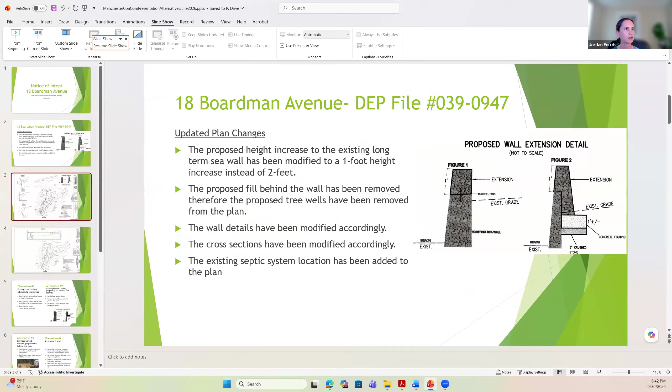Okay. So these are the topics I just explained. The 2 foot height has been changed to 1 foot. The proposed fill has been removed, as well as the proposed tree wells. The wall details have been modified, the cross sections have been modified, and the existing septic system location has been added to the plan. And then I can zoom in on the plan.

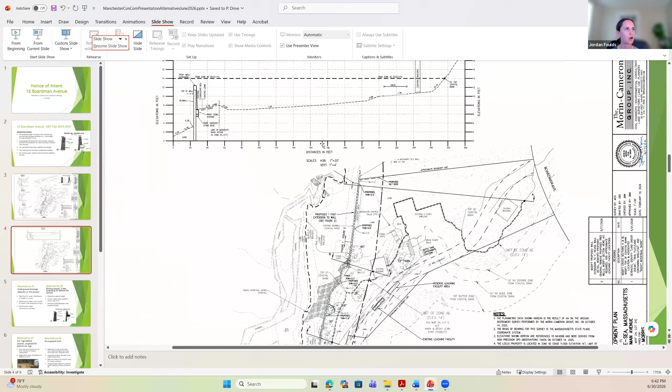As you can see, we've added the septic system and leaching field in the back over here, adjacent to the existing building in the back, as well as we've removed the tree wells and the proposed fill. And as you can see, the cross sections have been updated.

We have 4 alternatives. The first alternative is the underground drainage adjacent to the seawall. One of the commissioners had mentioned this in our previous meeting, and so we made that one of our alternatives. This would significantly increase the amount of disturbance to approximately 5,000 square feet or more, and this would be a significantly higher cost at around 3 times the proposed project. Additionally, this would result in a longer construction schedule.

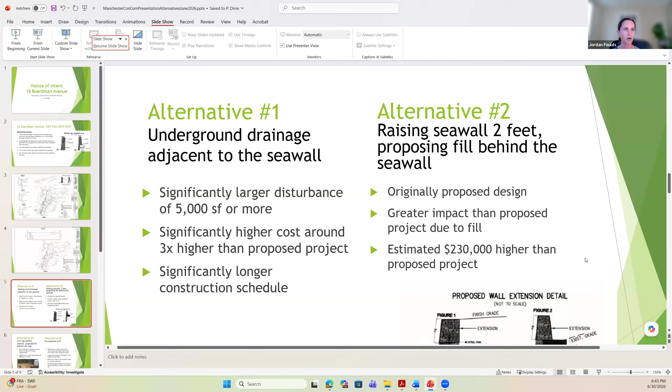The second alternative, raising the seawall 2 feet and proposing fill behind the seawall, was the originally proposed project, and this would result in greater impact than the proposed project due to the fill. Additionally, this would result in approximately $230,000 higher than the proposed project.

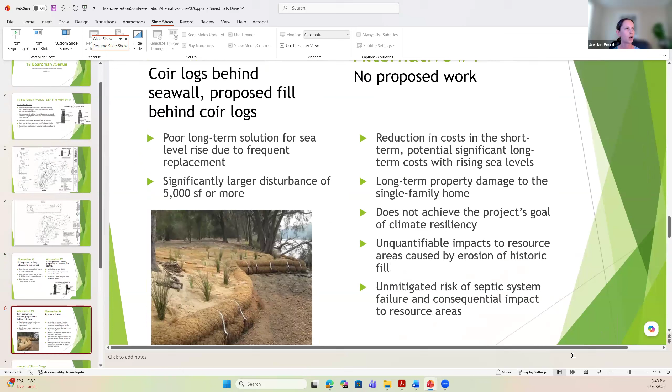The third alternative is coir logs behind the seawall and proposed fill behind the coir logs. This would be a poor long-term solution for sea level rise due to the frequent replacement of the coir logs, and it would result in significantly larger disturbance of approximately 5,000 square feet or more.

The fourth alternative is no proposed work, which would ultimately reduce the costs in the short term, but could result in significant long-term costs with rising sea levels. This could result in long-term property damage to the single-family home and does not achieve the project's goal of climate resiliency. This could result in unquantifiable impacts to the resource areas caused by the erosion of the historic fill and result in unmitigated risk to the septic system and consequential impact to the resource areas.

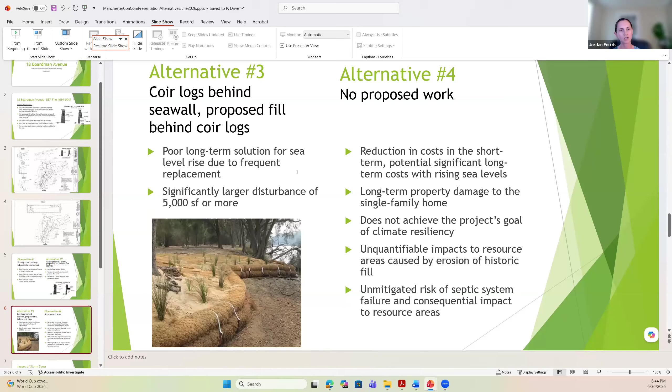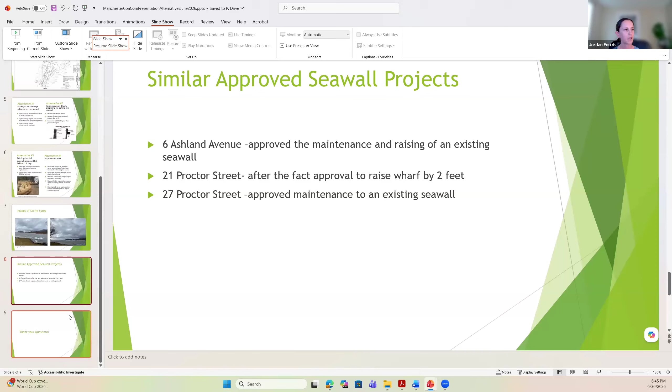Thank you, Jordan. Are there questions from the commission? I have a question, Steve. Fire away. Thanks. I appreciate the alternative analysis. Thank you for submitting that. You've noted the location of the septic system on the plans, and I seem to recall from our site visit, and it also looks like from the elevation, that these are quite a bit higher than the existing bank. So I was just wondering if you could comment on what you think the impact would be to the septic system. Are you asking about the impact with or without the addition of the 1 foot? Without any addition.

I'm going to answer only, and then of course Jordan can answer also. The problem with estimating an impact with sea surge is we really don't know how much overtopping there will be and when without the addition, even using the Commonwealth's own projections, which is what we have here. I'm sure other people like you have seen it in your own experience. Once erosion begins, it can be very sudden, it goes much further in because it's got a foothold in there. So the impact could be everything, or it could be nothing, and we don't know when.

Okay. And maybe just for reference, what is the height difference between the current seawall and the location of the septic area? Oh, I'll have to let a technical person see if they know the answer to that. I do not. It is on the plans, but I do not know. Yeah. My apologies. I'm just looking at the plans right now. I can pull them up. Bethany, you didn't happen to look at that, did you? While Jordan's looking, just in case you happen to know. I'm sorry, Mr. Chairman. I'm not supposed to speak to her without you. My apologies. We'll wait for Jordan.

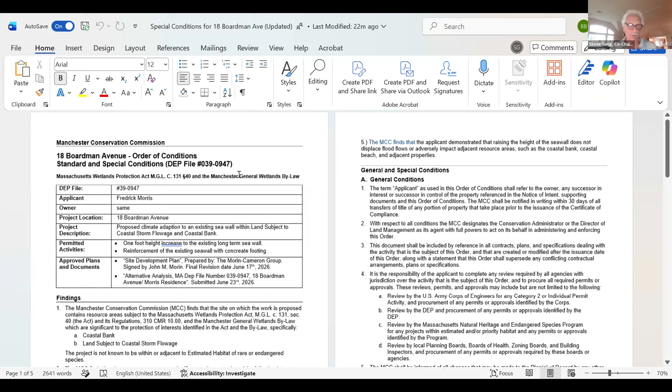Just for people from the public who don't come to every meeting, after we conduct our hearing and collect enough information, once we are satisfied that the information is sufficient to make a decision, then we move to issue an order of conditions, and we're determining what that will contain. Okay, it begins with findings, as always. So we identify what's at stake in terms of issues and interests, and then we have some specific findings, and the blue is edits I made just for clarity, but I'd invite anybody on the commission to suggest alternatives.

Finding 3 is that the commission finds that raising the seawall by 1 foot will not cut the ocean off from its floodplain, since the 100-year flood level remains above the finished height of the seawall. 4 is that the commission approves this project based on applicant's affirmation that the proposed height of the seawall will not cause erosion of the coastal beach due to the increase of wave reflection and refraction. And that reflects long-term residence and even longer-term presence of the wall there.

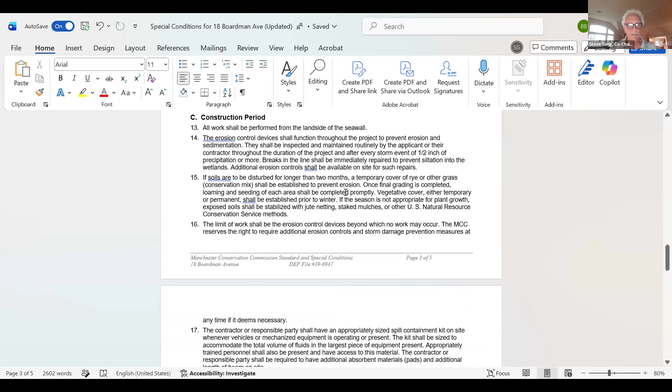And 5 is that the commission finds that the applicant demonstrated that raising the height of the seawall does not displace flood flows or adversely affect adjacent resource areas, such as the coastal bank, coastal beach, and adjacent properties. Those sound okay to the commission? Yes. Then we have a whole series of general conditions, which are, forgive the phrase, boilerplate. And I'm not sure we need to go through any of those. Pre-construction conditions and construction period conditions. Post-construction, and then the meat of the matter is where we put in any special and or perpetual conditions. So let me read these aloud, just good practice.

First special condition 28, use of toxic substances for lawn and garden maintenance presents a hazard to groundwater and resource areas. Due to this site's proximity to wetland resources and its likelihood to flood, use of pesticides and herbicides is therefore permanently prohibited. Only organic, slow-release fertilizer shall be used on site and only outside the wetland resources, the 30-foot no-disturb buffer zone and the 50-foot no-build buffer zone to wetland resources. With the exception of the minimum amount of organic material required to establish the mitigation plantings, of which I don't believe there are any. Fertilizers shall not contain pesticides or herbicides, shall only contain slow-release nitrogen, and shall not contain more than 3% of phosphorus.

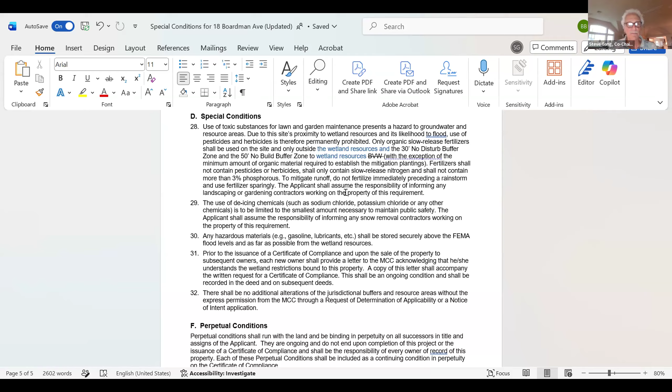To mitigate runoff, do not fertilize immediately preceding a rainstorm and use fertilizer sparingly. The applicant shall assume the responsibility of informing any landscaping or gardening contractors working on the property of this requirement. Suggestions or questions about that, commissioners? No. 29, the use of de-icing chemicals such as sodium chloride, potassium chloride, or any other chemicals is to be limited to the smallest amount necessary to maintain public safety. I'm not sure you're going to be treating any part that's jurisdictional for us in this site. No. So that one is there. That's like belt and suspenders and one hand on our trousers.

30 is any hazardous materials such as gasoline or lubricant shall be stored securely above the FEMA flood levels and as far as possible from the wetland resources. And this, I think, is pertinent only because there is an old ground level or maybe even root cellar type structure right there in the front lawn. Yeah. None of that stuff is in there. Good, that makes sense. 31, prior to issuance of a certificate of compliance upon the sale of the property to subsequent owners, each new owner shall provide a letter to the commission acknowledging that he/she understands the wetland restrictions bound to this property. Copy of this letter shall accompany the written request for a certificate of compliance. This shall be an ongoing condition and shall be recorded in the deed and on subsequent deeds.

And 32 says there shall be no additional alterations of jurisdictional buffers and resource areas without express permission from the commission through an RDA or NOI application. And the following section stipulates that those conditions 28 through 32 are deemed perpetual. So they do not end with completion of the project. They run with the property and the deed. Commission, any comments or ready to vote? Ready to vote. I'll hear a motion. All right. Move for 0390947, 18 Boardman.

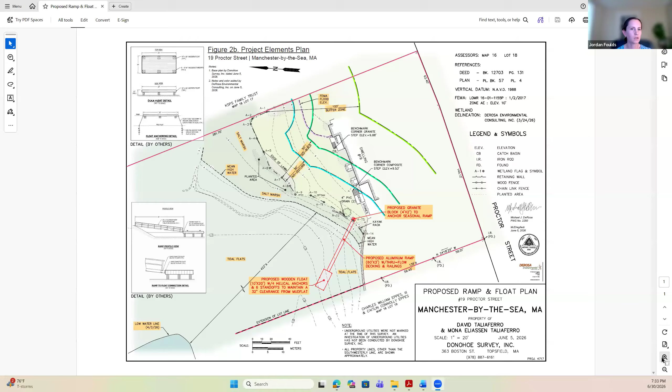Here, I can zoom in on the detail. The ramp portion of it is not proposed to touch the mud flat at all in this image here. Can you see the detail? Yep. So it actually will be all the way in the air, and then when the water rises, it will rise with the wooden float. Good. All right. Could I have a question?

Regarding the standoffs and the expectation that they're going to hold it off of the mud flat. Mud flats tend to be squishy, to say the least. And I would imagine this could easily sink pretty far down into the mud flat. What is there to prevent that? It's floating. It must be floating some of the time. It's not permanently held there. It's floating at high tide and settles to the bottom at low tide, is the way it looks. Do I have that right? That's correct.

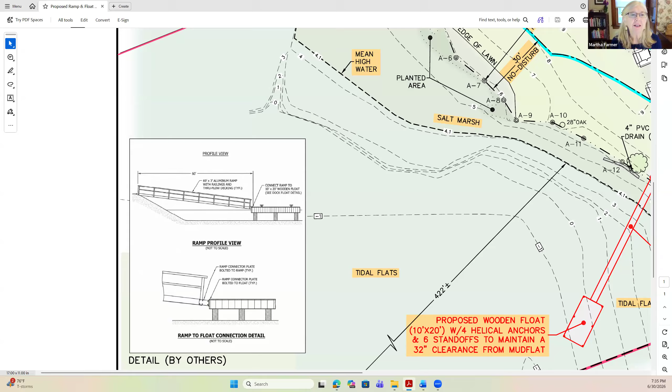And at 6 inches by 6 inches, what is to prevent those standoffs from just sinking down into the mud flat? The one that we have, if you did that, the soil composition is such that it would just burrow right into it. It's squishy. So you're concerned that the float might rest on the mud flat? Yes, and the standoff. I don't think it's going to stay 32 inches off the bottom. It depends on the composition of the soil below it. And if it's what it is in the inner harbor, it certainly won't.

So the standoffs are attached to the float, so when it rises, they'll rise with the float, and when it goes down, it will go down with the float. Yeah, I think it might burrow into the mud flat. When the stands are just resting on that, it's not soil, it's mud. Yeah, depending on how much sediment. The soil off of our dock is referred to as puppy poop. In consistency, technical term. In the past we've seen designs that use essentially skids that provide more surface area. Therefore, there's more impact to the mud flat, but less likelihood that the entire structure will end up resting in the mud.

Henry? So Marty raises a great point about the downward force pushing the float into the muck. And I have the exact opposite question: I would really like to see the force calculations for the flotation to raise this thing out of the muck with the weight of the dock plus the ramp pushing downwards on it. How do we know that the tide is actually going to lift this thing out of the mud?

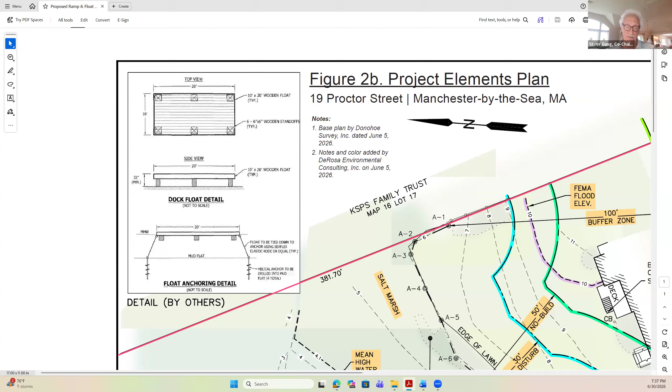There are a couple of other structures. I think there's one next door that Colby West has. And then there's some around in Days Creek that probably have similar conditions they're grappling with. But I don't think of ramps of this size. This is a sizable, 60 feet is a big ramp.

David? Well, in light of what Marc told us, that this may need approval from another committee, did you say the planning board, Marc? That's correct. Yes. We're usually the last committee that designates our blessings and approval. I would think that we should defer any decision until the planning board approves this. Yeah, I would agree with David.

Well, there's not necessarily a right or wrong process for an applicant to go through. There's no one that has to go first. So it's kind of their choice. I believe that they probably didn't know they needed to file with the planning board as well.

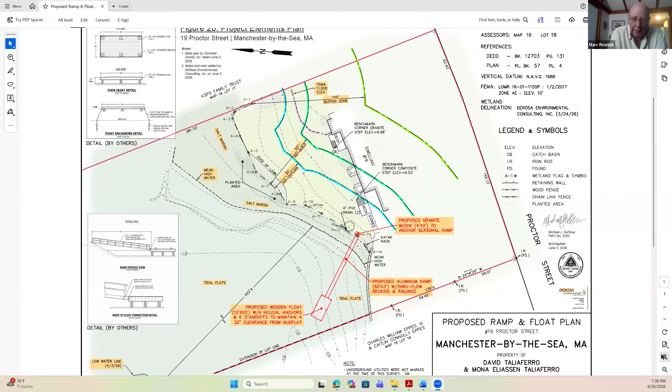The other thing is, as far as the floats go, I live right off the Annisquam here, and a lot of the floats, particularly some built by Ramsey, and maybe it's not shown if you put that detail up between those posts that stick down. Usually they use those big plastic, they look like big recycling bins that lift the float, and then they also sit on the mud as well, except they're not really showing what flotation they're using here. Most floats don't use the old styrofoam anymore.

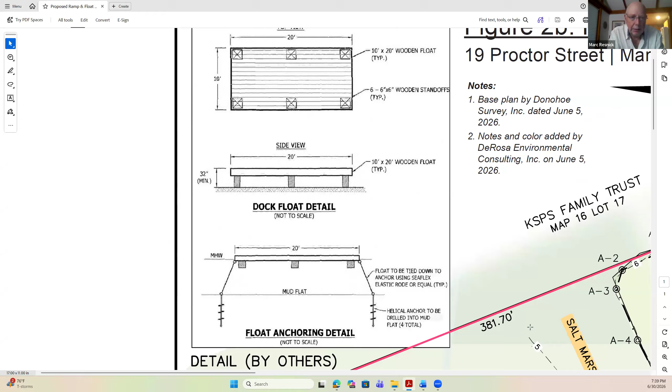So I'm wondering whether they're missing some detail to this, because it was probably meant to be less of a construction drawing and more for... Yeah. A direct impact on the wetland. Right, yeah.

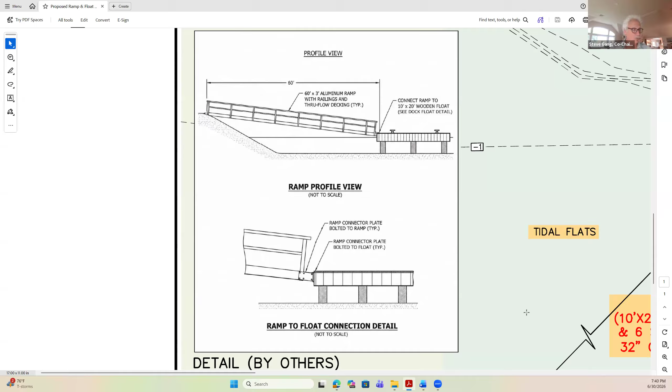Well, the other advantage of continuing, if the applicant's willing, is that we could get a direct answer from the contractor with their experience in this as to how this is going to function, whether the dynamics of the weight of the ramp and the weight of the float are going to push down those standoffs, or whether the standoffs will resist the weights. Commission seems inclined to continue. Is that my sense? Yes, for sure.

Jim, do you have a comment about that or other? You're muted. You're still muted. Sorry about that.

So if we're not talking about just 1.5 feet of things touching the mud flat, and we're actually talking about a bunch of bins touching the mud flat and maybe a boat touching the mud flat, I just feel like in prior situations we've asked for a little more offsetting, and I just think maybe beach cleanup is great, but so is planting eelgrass and some other alternative offsets. So maybe that's something to think about. Yes, I agree. Second that heartily. Yep.

Mitigation generally is a requirement of our bylaw at a 2-to-1 ratio. There's only a small impact on the bank from the granite block, but there could be a small amount of mitigation, converting some lawn to native plantings that go to their desired height instead of being mowed. So that's another issue for the applicant to take up if we continue. Before we move to that, is there any comment from the public on 19 Proctor Street, the ramp and float?

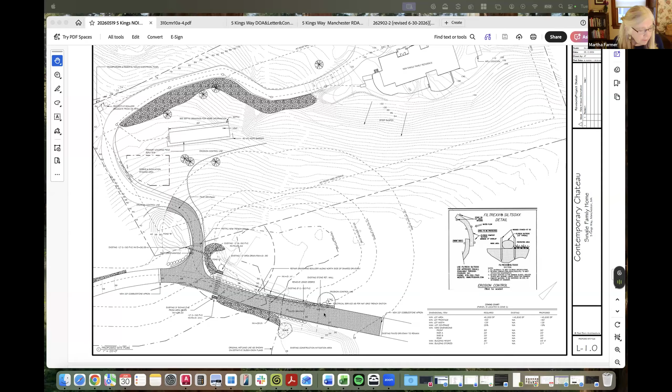Marty? The language in this says the trench will continue along the shared common driveway to the south, pass over the bordering vegetated wetland, where it will then turn onto the driveway for Kings Way. And I don't understand what is the mechanism or the mechanics of passing over the wetland. How do you do that? With what? Yep, sure. So maybe a different use of language here would help, but we are using a trench to come through the bordering vegetated wetland here. Here is our wetland line, as well as our buffer offsets.

So the existing transformer is here. We provided a trench detail as part of the drawings, but the trench will come along the edge of the driveway here, through the wetland, and then up onto our property. So passing over means actually digging through. Digging through, sure. Yep. That's different. Okay, thank you. Thanks, Marty. That's helpful too. Other questions or comments from the commissioners?

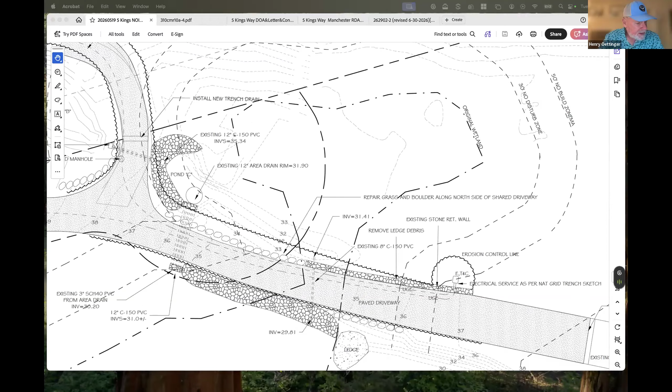What's your thought about a site walk for this one? Yes. Yeah, probably helpful. Steve, should we wait to get the DEP number and all that? Yep. Well, we can take advantage of the delay actually so as to not slow down the project. Yeah, I'll move then. We continue 5 Kings Way, and I guess we should talk about a site visit time. Sorry, before you do that, let me just check to see if there's any public comment on this now that's open. This is 5 Kings Way, trenching to extend power utilities.

I don't see anyone. Nope, I don't see anyone. All right, go ahead, Henry. Yeah, I'm going to move to continue 5 Kings Way. There's no DEP number at this time, and schedule a site visit as well. Continue to the July 21st meeting. Ryan, you okay with each of those? I am absolutely okay with each of those approaches.

Thank you. Second? Second. Thank you. All in favor? David? Aye. Marty? Aye. Arnold? Aye. Gordon? Aye. Jim? Aye. Henry? Aye. And I'll make that unanimous.

All right, let's pick a site visit time. This weekend is probably out, all things considered. We do Saturday the 11th. Does that sound good? Saturday the 11th, working for the majority? I can't do it then. Would Sunday work better, Marty? I'll be in Seattle that weekend. Oh, okay. I may be out of town as well, but Marty, you and I can do a separate site walk.

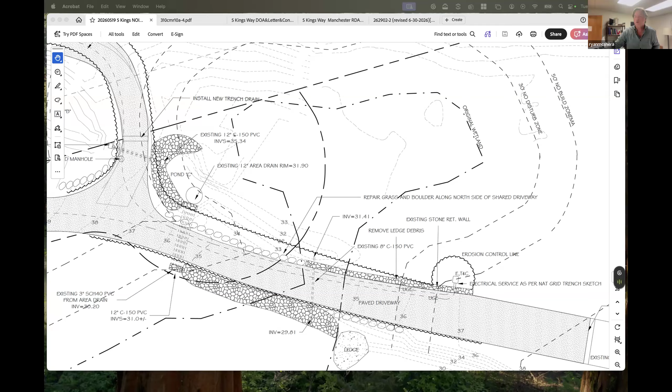8 o'clock? You mind? Yeah, whatever pleases the board, honestly, the commission, excuse me. Got it. The 18th of July, 0800 hours. Somebody bring Duncan. Excellent. Thank you, everybody, for your time tonight. I really appreciate it, and we'll see you on the 18th, and I'll get more materials to the board as I can. Thank you, Ryan.

Okay, at long last, we come around to the fifth notice of intent, which is 0 School Street from Jeff Engler on behalf of the property owner, Andrew Brown. We don't have a DEP number, or maybe we do. No, not yet. So for that reason, among others, we'll be continuing tonight. But I have a few comments in advance just to set the stage. This is, by my estimate, the largest project we've looked at. We've seen things on the commercial side like cell signaling, but this one, in terms of the wetland implications, is more complicated than that site.

Bear in mind that since it is a 40B project, we are reviewing it only under state law, the Wetlands Protection Act, and any other relevant state law. Having said all that, we intend to be thorough given the size and complexity of it. It's a relatively large site that many are familiar with on the top of Shingle Hill, with some rather steep slopes on various sides and some wetland resources at the bottom of the slopes of various kinds.

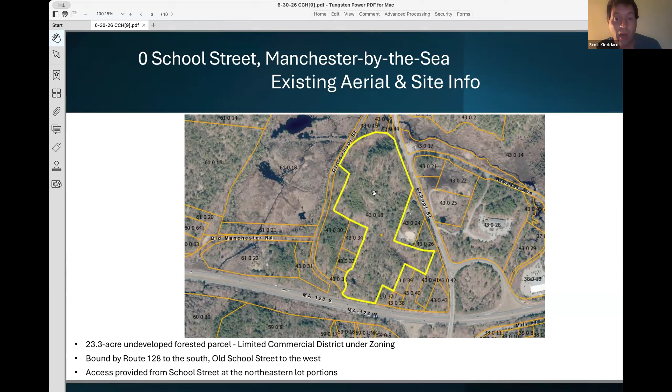So just a high-level overview. The site is not unfamiliar to most anyone in this conversation today, but it outlines the 23-acre parcel that is bounded by School Street and Route 128, and then the so-called Old School Street on the western side. The access to the property is going to be coming in off of School Street and entering that main central portion of the property on the northern part of the site. And that is the largest contiguous upland area on the property. All right.

So this here shows the existing wetland resource areas on the site as a whole. The way that this plan is depicted, it splits the site into two halves. So the left side of your screen is the northern part of the site, and the right side of the screen is the southern half of the site.

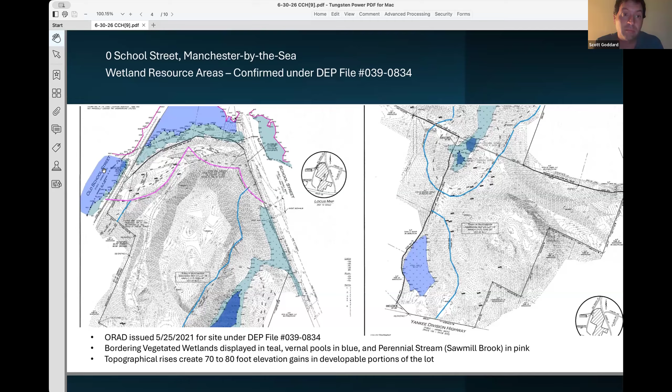Everything that you see in sort of that lightish blue teal color is bordering vegetated wetlands. BVW is regulated under the Mass Wetland Protection Act. The area that's shown in pink there to the north is Sawmill Brook and the mean annual high water of Sawmill Brook. Sawmill Brook is considered to be a perennial stream, and as a perennial stream, it has a riverfront area associated with it.

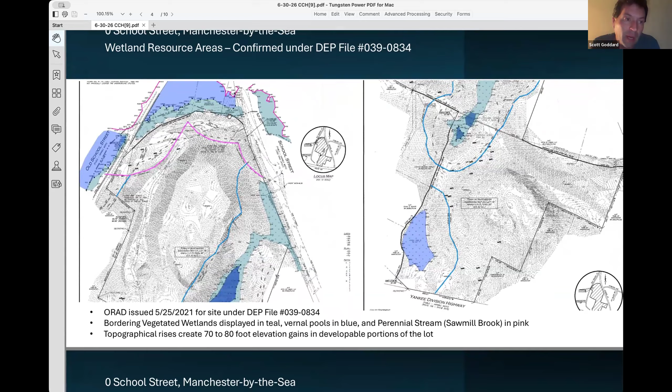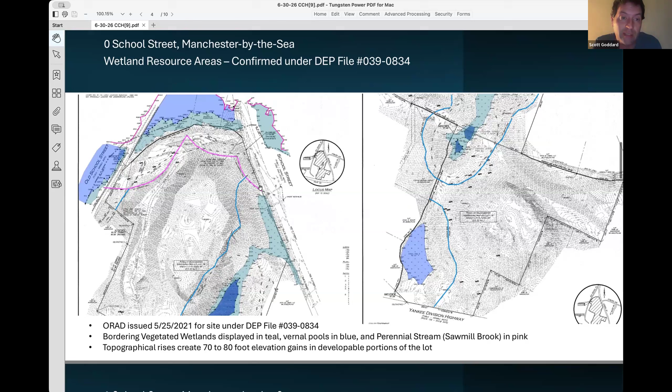We have also a couple of areas of isolated land subject to flooding, vernal pools, et cetera, like this that surround the site, but those are going to be more off in the distance. These dark blue areas are vernal pool locations on the site. So I should point out that I mentioned Sawmill Brook. So the boundary of mean annual high water really is this pinkish line that goes out on the back. And then this pink line that comes onto the site that my cursor is following, that's the 200-foot riverfront area. All right.

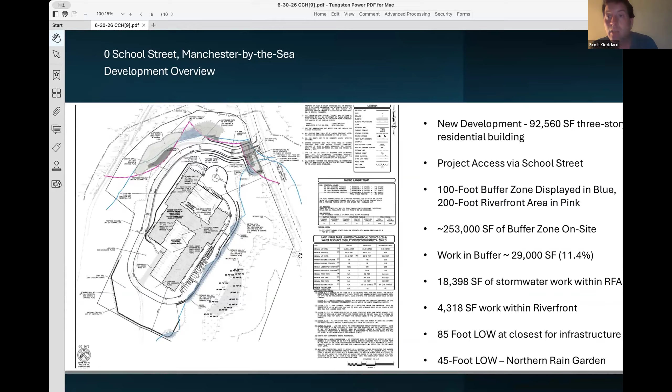Here's the proposal. The proposal is a 3-story residential building that's about 92,000 square feet in size. It has 136 residential units proposed within it. There is access coming off of School Street, and that access is really what triggers the bulk of this jurisdiction. If there was a different access point that could have been less intrusive into buffer zones, we might have had even further reduction, but as it stands, the work is fairly minimal within the buffer zones.

When you look at the project in its totality, it's sitting on a hill in large part, right? So the top of the hill would be leveled, flattened to create the pad for the site, and then everything remaining around the perimeter is effectively the side slopes heading down to the wetlands to the north, to the south, off to the east toward the road, all drops down in grade. And if you look at the entry point right here along School Street, that's where we have a 2-lane driveway access, 1 lane coming in, a 4-foot landscape strip between, a 2nd lane coming out. We have a little bit of grading, and we also have a pump station. The pump station is there to allow the sewage from the development to properly enter into the municipal sewage system.

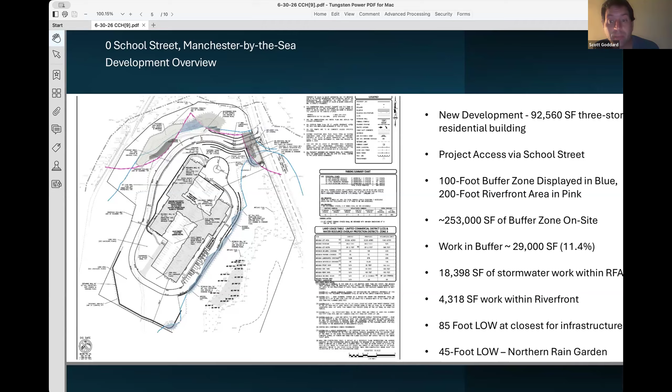So our total impact to buffer zone on the subject site is 11% alteration, meaning 89% is being left in its natural state. And the areas where we're doing work within the buffer zone are in the outermost parts of the buffer zone, so furthest away from the wetlands. So we're really not in any way in close proximity to the wetlands. Our nearest point is right in here at the access point, where we are about 45 feet away. And again, all this is driven by the need to get upland access into the site.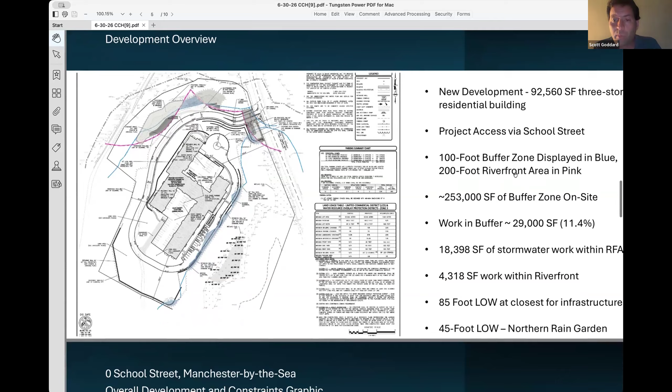We also have some work within the riverfront area. So again, this pink line is the 200 feet from Sawmill Brook. The riverfront area impact within Sawmill Brook as it relates to side slope grading is 4,318 square feet. So a very small amount of work within the outermost part of the riverfront area, and it's under 5,000 square feet, which is under our allowable amount for riverfront area impacts under the Mass Wetland Protection Act. There's an additional area, which is this shaded gray zone, of 18,000 and change square feet of work within the riverfront area that's attributable exclusively to the management of stormwater.

That 18,000 square foot is exempt under the calculation for impacts to riverfront area under the regs. And the reason for that is that it's stormwater related, and we don't have reasonable alternatives to move that stormwater management elsewhere. And the reason for that is it requires grade, topography, and elevation to allow our stormwater infrastructure to sit in that proximity. So we've done everything possible to keep that as far out of riverfront area as possible, but it is exempt and allowed within that zone.

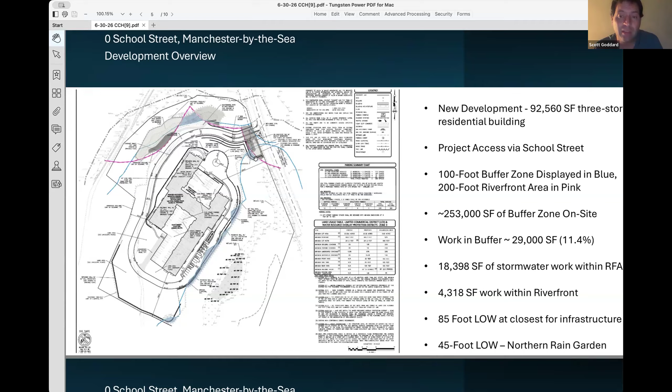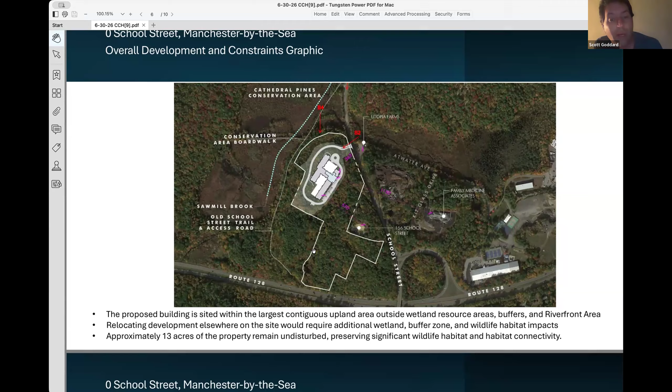All righty. Moving on, now this is kind of a zoom out, right? Looking at the site in its totality, it shows you the context and the layout of the site development within the site overall. We're sitting on that northerly part within the largest contiguous upland area. The reason for this is to minimize anything that looks like wetland crossings, wetland impacts, and leave intact zones for significant wildlife benefits and wetland contiguous habitat types.

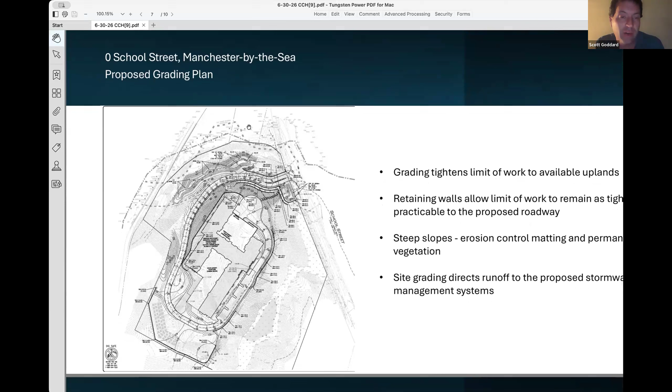So this is a grading plan. It's a little bit detailed, probably not relevant to getting too far into the weeds on it, but what you can note, if I zoom into this area of the grading plan, you can see the tightness of those topography lines, both up in the development area, in the stormwater area, in the existing conditions plan. And the tightness of those lines indicates the steepness of the slope.

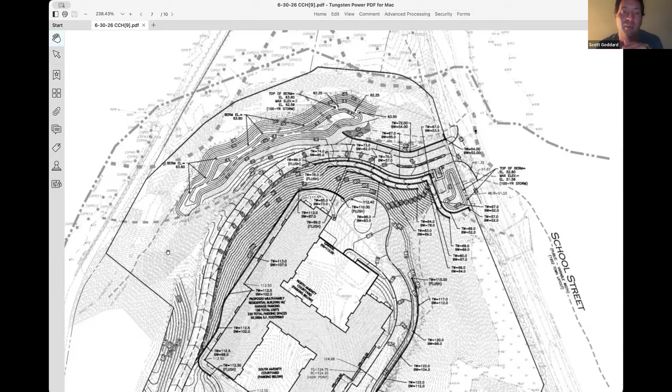So that becomes the challenge on this site, is that we're dealing with a fairly aggressive slope over the entire site. So a lot of grading work, a lot of site work is needed. Retaining walls have been used to tighten the grades, pull the grades back. But so much of the design from a civil engineering perspective here is driven by elevations, by grading. So that shows you, I think, in a helpful way, some of the challenges that we're up against as it relates to grading.

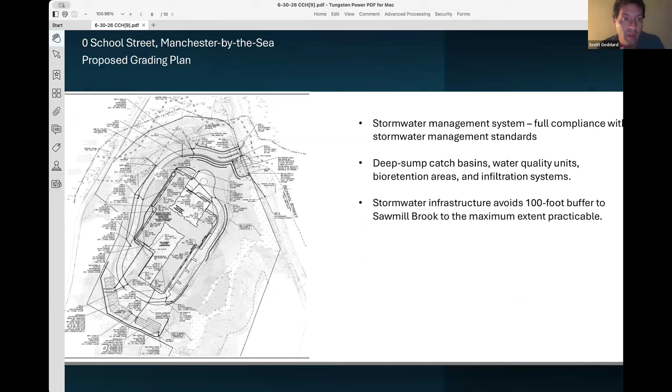This is a slide that shows the stormwater management system and the deep sump catch basins, bioretention systems, all that good stuff. Now, we can get into this and I could have Carlton present this to you in detail if the commission would like. You can see we have infiltration basins over here. We have a whole number of fairly intricate stormwater management systems. This has been thoroughly peer reviewed already at the ZBA process by third-party experts, and this has had a substantially rigorous review of the stormwater system.

Carlton, do you want to give a high-level view of how the stormwater is being managed on the site? It could be helpful if you wouldn't mind. Yeah, I have a few notes I'd like to go through, and I have a couple of slides of my own if I could share. Oh, yeah, for sure. I'll stop my sharing and turn that over to you.

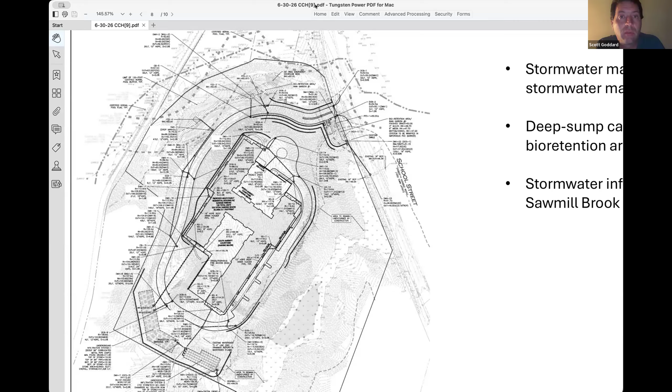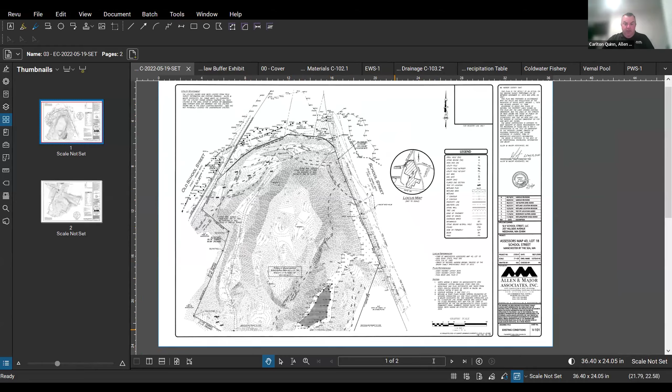Good evening. My name's Carlton Quinn, principal at Allen & Major Associates. We were responsible for the land survey and civil engineering on this project. Scott has touched on a number of points. I might go through them again, but I will be quick. You can see this is the site here. We're dealing with significant topo. The site's predominantly wooded with some areas of ledge outcrops. This is the north side and the south side, which Scott has already gone over. You can see our development up here and the size of the site up here.

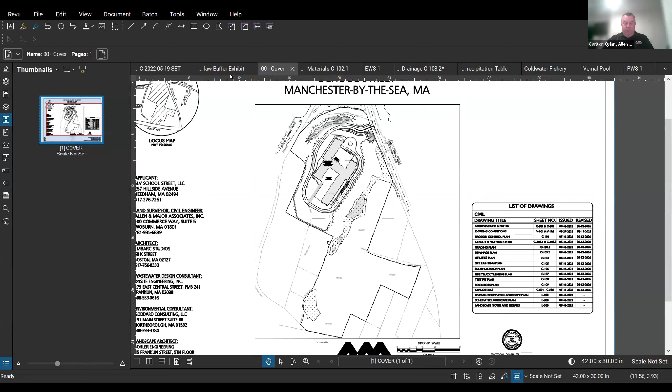I put this quick exhibit together to show this green line is the extent of our disturbance, where the grading would end, kind of our erosion control line. This represents about 8 acres. That is only about a third or 34% of the site, which means 2/3 or 66% of the site is going to remain undisturbed as part of this project. And we did minimize the disturbance to the maximum extent practicable.

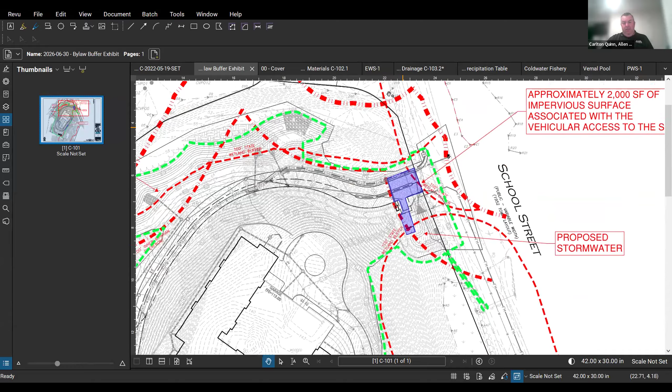Here is a little zoom in on the frontage. You can see we have a BVW here and a BVW and a vernal pool here. And this is our roadway here. And we couldn't slide it any further south because there's a driveway here and it would conflict with some turning radiuses. And there were some topo issues with it going south. So it's kind of in the middle of both of these BVWs to try to minimize the disturbance.

But you can see the whole frontage here is within buffer zones from across the street and the two wetlands to the side of it. So there really is no other alternative on the site to get access without crossing a BVW or creating extensively more disturbance.

You can also see here, I highlighted in blue the areas of impervious surface within the WPA jurisdiction. You can see there's about 2,000 square feet here as part of the entrance, and then another 1,500 square feet here. So that's about 3,500 square feet of impervious, and that adds up to about 1/4% of the impervious of the whole site is within these buffer areas, and that's just going to show you that we did try to minimize this to the maximum extent practicable to any disturbance around the site.

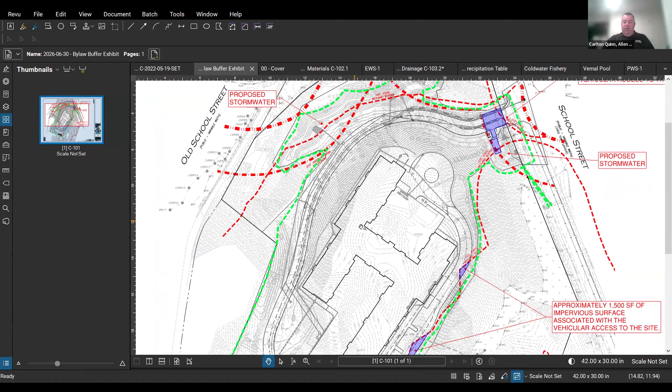The stormwater locations here, not only set, I think Scott made a good point, by elevation, location, they're also set in the areas of good soils where infiltration can take place because there are significant areas of ledge here. So this area was a good soil over here, and this area over here was good soil here, and it's just downstream of the roadway here. Once you get further towards the roadway, the soils were very bad. So there really was no other location to put these stormwater systems.

I did mention we did test pits. Those test pits were witnessed by a Mass DEP hydrologist, as those test pits were originally proposed for a leaching field for a wastewater treatment plant, which we had a lot of pushback on in the ZBA process. So we switched from kind of an on-site wastewater process to pumping the sewage off-site, which I think is a benefit in whole to the wetlands, removing that leaching from on-site.

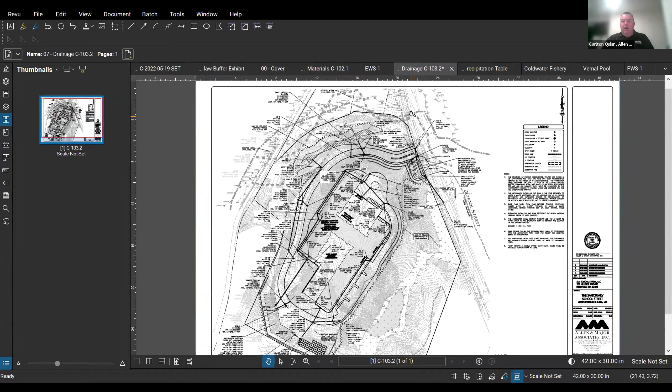So there are a couple of areas on the site which have vernal pools. There is a cold water fishery to the north of us. And the BMPs we chose on this site are the ones that are recommended per the DEP. I just wanted to pull up these tables here on best management practice for cold water fisheries. These are exactly the structures we use for pre-treatment. We did deep sump catch basins, the proprietary separators.

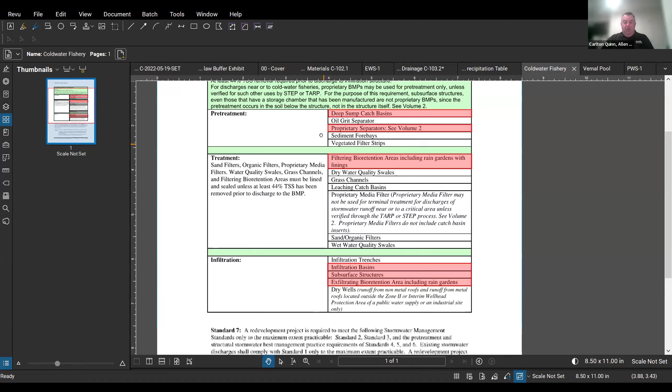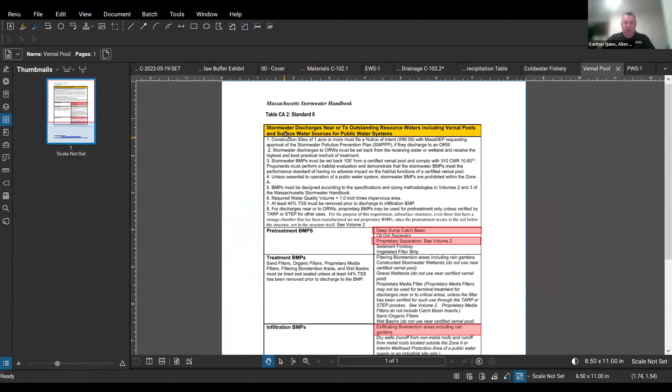We have a filtering bioretention up at the front where we don't have great soils. And we used infiltration basins, subsurface structures, and an exfiltration bioretention. So you can see this is exactly the type of stormwater BMP that the DEP is looking for in these areas. And similarly with the vernal pool, discharged near outstanding resources, including vernal pools, it's deep sump catch basins, proprietary separators, bioretention areas, and infiltration basins.

Highly recommended. So these are the type of systems they want to see in these areas. And that's how the site was designed with these in mind, just to be respectful of both the vernal pool and the cold water fishery. As part of the peer review process, it was determined the project exceeds all the minimum standards for the Mass DEP handbook.

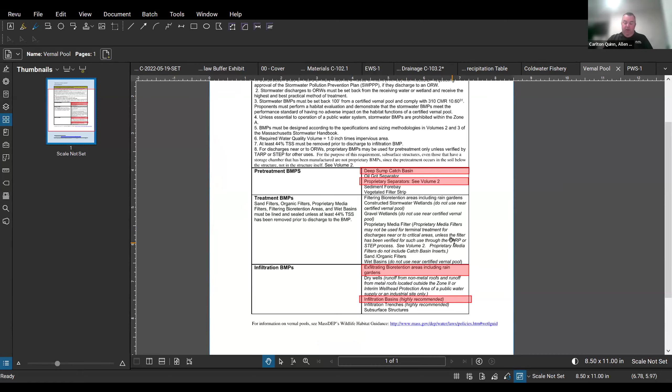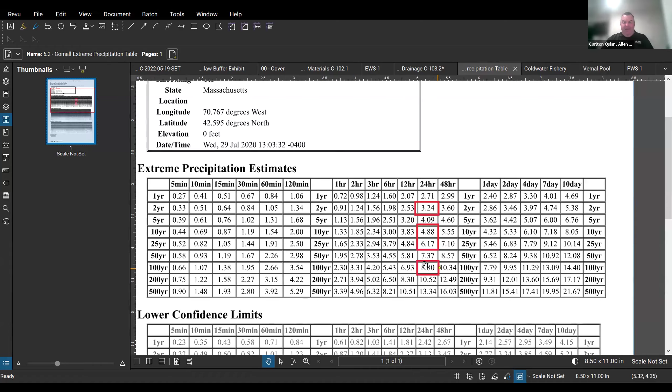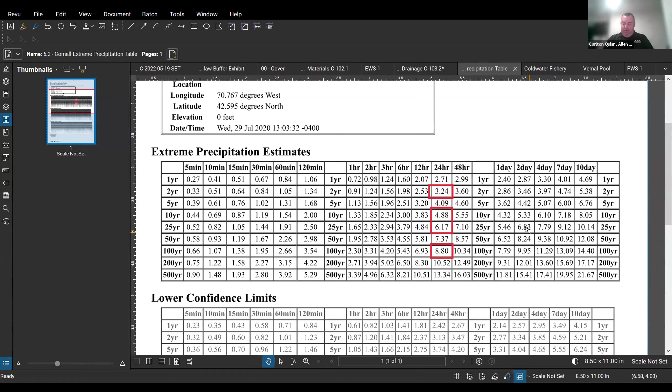I also wanted to note the rainfall. The rainfall events here, we were requested to use the Cornell extreme precipitation rates. And you can see here, the 100-year storm is at 8.8 inches. The standard Mass DEP NOAA Atlas 14 is at 8 inches. So we're 10% above the rainfall data used per Mass DEP recommendations, which should show the site has thought about some climate resiliency. Those are all the notes I got, and I'll pass it back over to Scott.

Thanks. No, Carlton, that was excellent. I think that pretty much wraps up the presentation of the project to get this going. We clearly don't have a DEP file number, as the chairman stated. There's going to be a fair bit of input from the abutters or the public, which is appropriate and fine. And we're here to start addressing questions as we work toward seeking an order of conditions. So we'll turn it back to the members of the commission to advance this conversation.

Steve, you're muted right now. Good catch. Train's going fast.

Thank you, Carlton. Thank you, Scott. It's a good way to start. Next, we will survey the commission for questions. Yes, I have a couple. Go ahead, Henry. So I guess probably for Scott, I'm curious about, I was around for the 2021, 2022 plans. Have there been significant changes in the current plan from the 2021, 22?

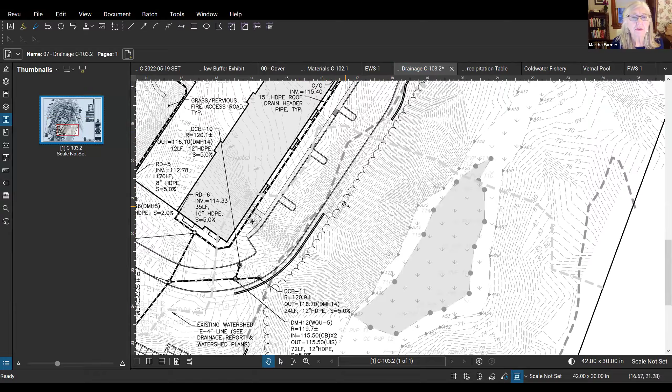To put in the retaining wall there, you'd be doing more encroachment in that area, I guess. But I'm surprised there's not one to protect the vernal pool. It's actually a fairly easy question to show you, because the cut here falls along the 120 line, and the elevation here is about 120. So we don't need a retaining wall here. It's at grade. It's not physically needed. That's why there's a break in the retaining wall. Okay.

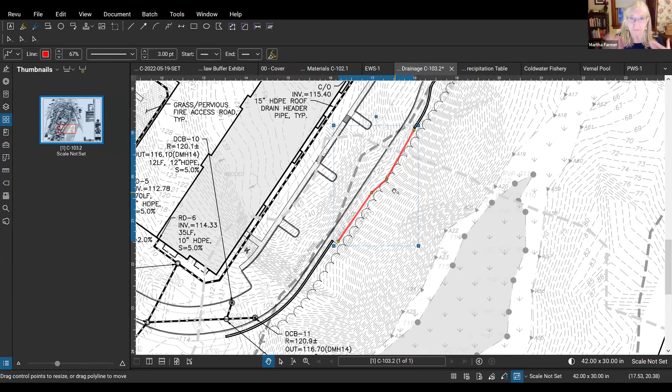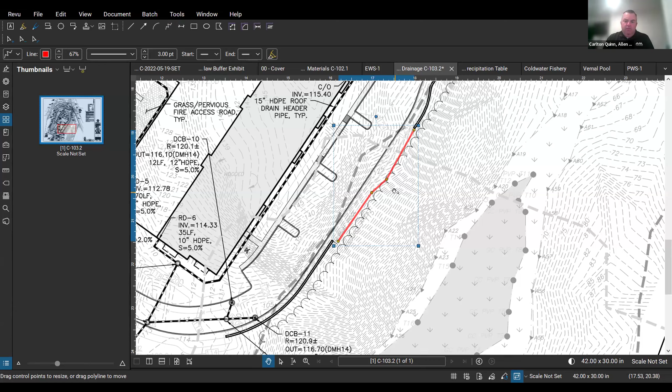So the wall is not going to protect anything. The retaining walls protect material from flowing downhill. So the fact that it's at grade, maybe I just don't understand how you get protection in that space from that road going right over the edge. Well, if there was a road down there, we might put up a fence or a guardrail. We'll have a fence and a guardrail up there anyway. There is fall protection for humans, but we're not proposing any barriers for rocks or anything falling down.

Let me provide a little context also for Martha's question as well as Henry's about cut and fill, which is a concern which you can help us figure out and resolve, that the process of preparing the site for construction is going to involve a lot of demolition of material, trees as well as rocks, and removal of some of it. I'm assuming only a fraction can be reused on site for grading. But we'd love to see the specifics on that.

And the reason is that temporary disturbance, I assume, will be before the more substantial drainage systems and stormwater management facilities are built. So the temporary impact may pose a particular threat to the wetlands under our jurisdiction. And we just need to understand that, see if, in fact, there is no concern there or whether there might be a significant concern. Are you talking like an erosion control barrier to protect the wetlands, or is something more substantial?

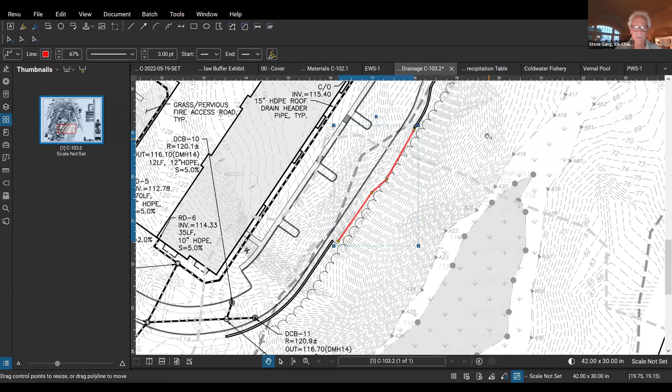Well, given the magnitude of 100,000 cubic yards and a lot of wood cutting and the grades you're dealing with, I guess that creates our interest in the sequence of construction, how material will be removed from site before the driveway is finished. I don't disagree. It's certainly going to be a complicated process to move that material off the site, but I think you would absolutely need a site contractor to provide input on their means and methods, and we're probably years away from that at this point. Is that something that could be conditioned, as that would be brought in front of you before it?

Yeah, once we understand it, magnitudes, duration, types of construction activity, even if you can't provide specific sequence, which I understand, we need enough information in order to gauge that degree of temporary impact and judge whether conventional erosion controls are going to be sufficient to deal with that. Understood. Thank you. Okay. Arnold, your hand is up.

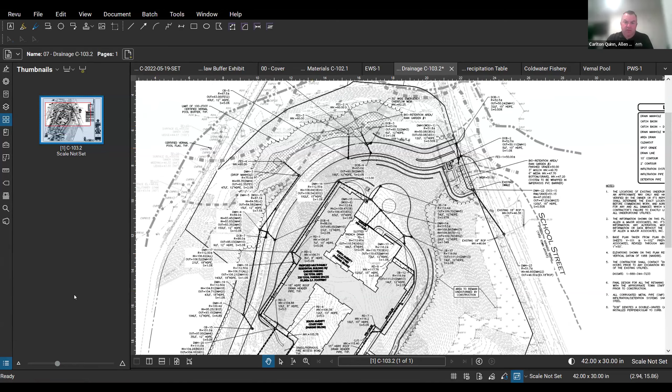Yes, going back to Martha's question about the trees, I'm not sure if we ended up at a clear point regarding the estimates, but whatever information we could be provided regarding the total volume in cords or board feet, for the whole project versus also focused on the critical areas for wetland and vernal pool protection, and ideally some estimates: are we able to preserve a 50-foot buffer around vernal pools with an undisturbed forest strip? I believe we have a 100-foot buffer to the disturbance around any vernal pool. Yeah, that's a good point, Carlton. Yes, Arnold, there's no work within 50 feet to any vernal pools. In fact, to Carlton's point, there's no work within 100 feet to any vernal pools.

Oh, good. Yeah, we'd still like to go back to the estimates for how much removal of trees in cords or board feet, ideally. I'm not sure if it's already in the information provided. That is certainly not in the information provided. No. I would appreciate it. Thank you. Thanks, Arnold. Jim.

Thanks. Could you just go back and explain? I'm new to this project. The grade of this drive. What's the maximum and what's the average? Yeah. So the average grade of the driveway is about 4.5%. Obviously, when we're building the driveway, we want to cut the least amount and fill the most amount to get it installed, minimizing the disturbance. So there are areas where the center line of the road gets to about 7%. This was one of the main points of the denial by the ZBA, so this was thoroughly reviewed. But it's all within state fire regulations, and I think it might even be below your subdivision regulations, at about 7.5% max. Okay.

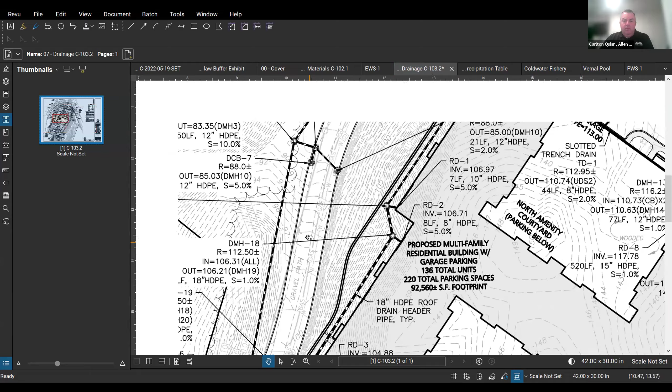I mean, you may have to cover some old territory again. I apologize for that. But when we're speaking about the water flows that you mentioned, the 100-year flood or the 8 inches, explain to me where that goes. So it's coming down a drive. When you get to that 4.5%, that water flows like a river and causes a lot of scouring. Steve brought up a good point that during construction we won't have any of this mitigation, but when the project's done, just walk me through how this water doesn't end up scouring and overflowing the system and ending up in the resource. Okay. Yeah, sure.

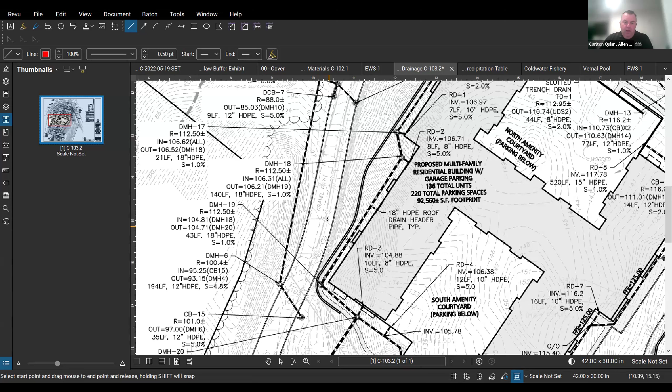So it flows down the gutter line, mostly in the driveway. It would get caught by a deep sump catch basin, right here, illustrated by this circle. It would be run through a water quality device, which is this one, to remove the sediment and get to our minimum 44% TSS removal requirement.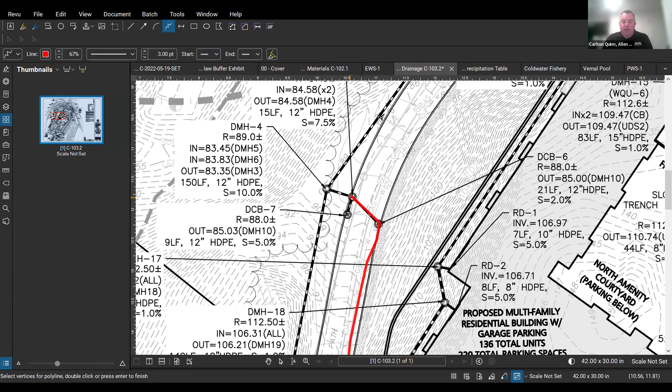It would then go on in a closed pipe system. It would then discharge to this bioretention swale, which would fill up and infiltrate the water, the required water quality volume, and the required recharge. And in 100-year storms, this would overflow in this 30-foot wide emergency overflow weir. We've provided a level landing here to reduce the velocities below the maximum velocities allowed within the MassDEP stormwater regulation to prevent erosion and rutting down.

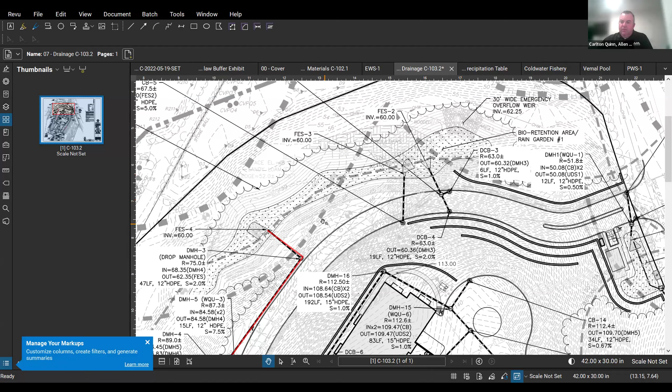So stay on that point. How are you going to slow the velocity down on a driveway that's this long and steep? The velocity, I'm speaking about the overflow weir, not the velocity in the gutter line. Okay, because I see a lot of water not going into these. We did provide, I believe, gutter flow calculations in the drainage report that illustrate the overflow past the systems at certain rainfall events. It should be within the material, but I will double check that.

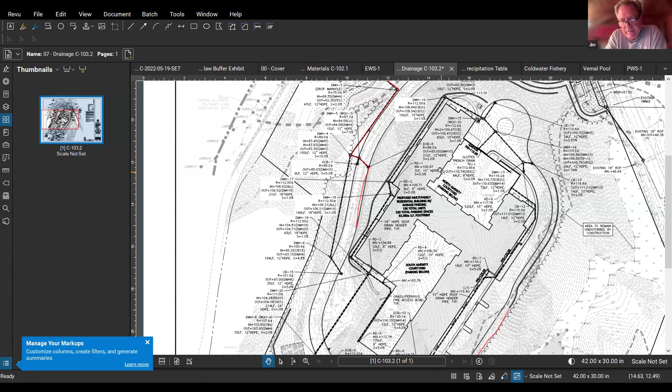Okay. You're talking about the gutter flow coming down the driveway, bypassing the catch basins? Yeah, it's picking up everything off the roof and everything else and coming off the sides of these steep walls. It just seems like you're concentrating a lot of water that could be moving quite fast when you're dealing with a 4.5 to 7% grade. And that can not end up where you want it to end up, but it can end up moving a lot of sediment to places where we don't want it to go. So it doesn't go through the system because you can't capture it if it's flowing fast. That's my concern.

I'd like to see that analysis, even if I read through that drainage report and it's 400 pages and I couldn't find it.

Should surprise you got through it. It was tough. The coffee maker is still hot.

So it's the slope, the water speed, the amount of volume that you're talking about. That's my concern. So a different element of water, just a different topic. You said that you kind of looked at maybe some kind of on-site treatment, but you're now going to connect to the sewer. Explain how that works. I don't see that on the map. That's a separate process? Yeah, so the connection from the site to the system will be a completely different project and a process that will probably be before you again.

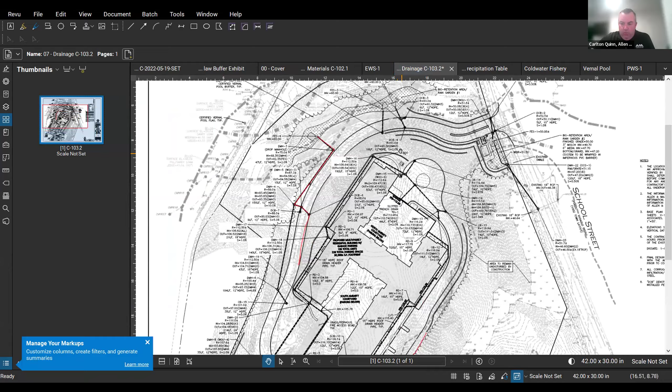We are showing the collection system on site and the pump. So it would all be collected in a pipe system. It goes down the road. There are minimum and maximum slopes to these pipes that you're allowed in a sewer situation. They all meet those. And then it goes into this pump station down here. And this pump station would then pump the sewage down the road on School Street to the existing main. So you're going to have to go under 128? We would have to go under 128. And that's all in the records too. We have a conceptual layout of how the sewer would be laid out. I'm happy to provide that.

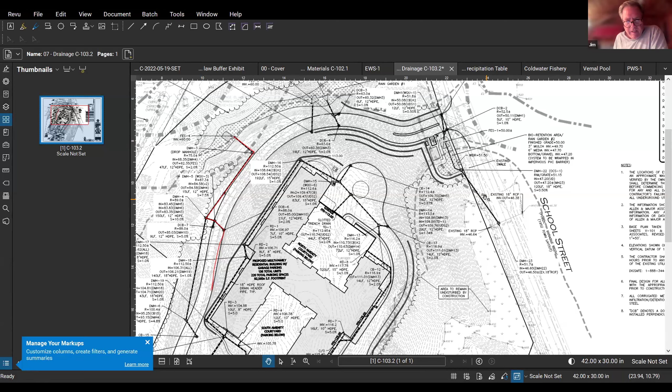That's common to do that? Is that drilling? Yeah, it'd be directional drilling. They can drill. They've drilled under the Connecticut River before, thousands of feet. It's a process they can do.

Ellen, is there a good reason not to bundle the wetland resource questions involving that part of the project with these? I think it was a significant investment to do that where there's a lot of pieces on this that are still not closed out. And that will also involve the DOT, which really can't be started until the local process is finished. So, can you say a little more about that? The DOT generally won't review a project unless you have your local entitlements because they want to make sure they're dealing with the final product. Right, which in my mind is a stronger reason for combining all of the wetland impacts of this project, including the sewer extension. Why wouldn't you do that? They're not going to do that. It's just a very expensive process to get through when they're not sure they have a project.

All right. In your drainage plan, another couple pages that struck my interest is the lighting plan, and you're going to have to light the whole driveway up. I assume these lights stay on all night, or... They would need to be on all night for security, certainly. Yeah, and for safety.

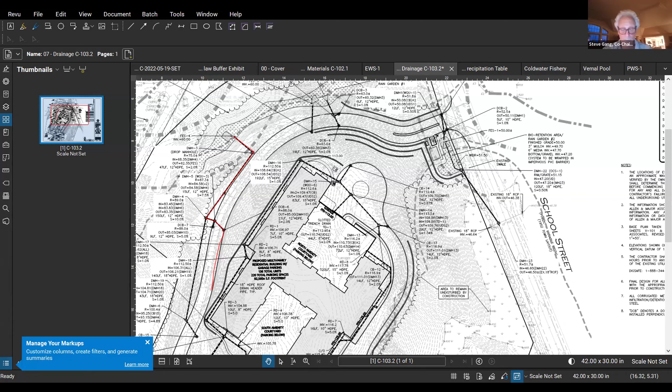Carlton, that would be more credible if it weren't generally believed that no one would ever be able to build something of this magnitude on that hill. But yet you are trying. So let me repeat David's question. Assume that impossible things can be proposed. How will you protect that land? I mean, I think the safest answer to that right now is that there's no proposal for that land right now. Then we have to concentrate on the proposal that's before us.

We don't have a proposal to change that land in title fee or put it into a conservation restriction. The proposal right now is simply for it to sit as open space. And I don't have any personal knowledge beyond that, but I don't think we can review something that's speculative of the future. Carl, do you have any more information on it than that? Because I don't. I don't. But there's no proposal that I'm aware of for that. Right. Well, we'd be curious whether there's any fundamental objection to it being perpetually preserved. We can get back to you on that. Good. Thank you.

Henry, has everyone had a bite at the apple? We have gotten through, and I mean, we'll probably talk more about vernal pools in greater detail. Is that something you want to do now or at another time? Well, I'm just curious because I suspect that that's the biggest moving target in terms of wetland resources. And I wonder, has anything changed in terms of identification of potential vernal pools or certification of any pools since the ORAD issued?

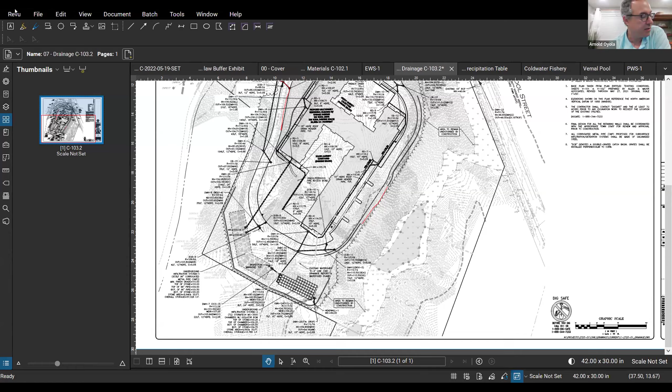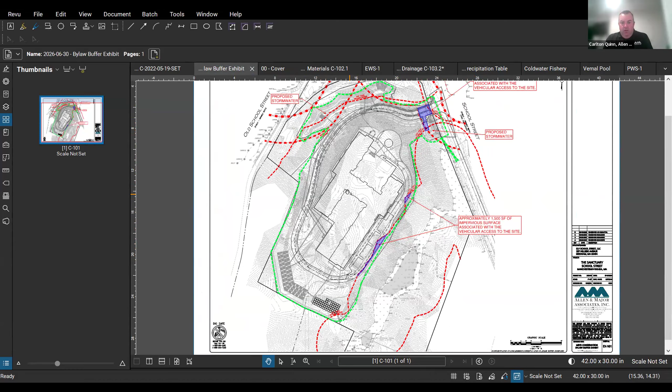So Arnold or Marty, any further final pressing questions before we touch a couple of other subjects and open up for some public comment? Just, if I may, for Mr. Quinn, a clarification about the impervious area. Could you please go over very quickly the figures for the impervious area that is proposed in the project? I did not really go in depth on the impervious areas. I was just noting the minimal impervious areas that are within the buffers. It was just 3,500 square feet, and I believe the total impervious area on the site is just under 4 acres. So I think less than 2.5% of the impervious area on site is within the buffers. Okay, thank you very much.

Okay, if the commission has completed at least our initial questions, and thank you, Scott and Carlton, for handling them. It's our intent to propose an additional peer review of the stormwater management with particular attention to the protection of outstanding resource water, including certified vernal pools, and there may in fact be some that are newly certified since the last habitat study, directly off-site, but within the zone where one might ask whether there's going to be any effect given the steepness of the hill.

So what we need to do for that is first the formality of voting as a commission to propose peer reviewers, and then we have to bring you some candidates with their proposals of scope and expense and whatnot.

I don't want to get the cart before the horse here, because we do not have as yet what we consider qualified peer reviewers with proposals in their hands, but we will shortly. So I think it's appropriate just that at this stage that the commission vote to authorize that process, and then we can proceed to the necessary next steps.

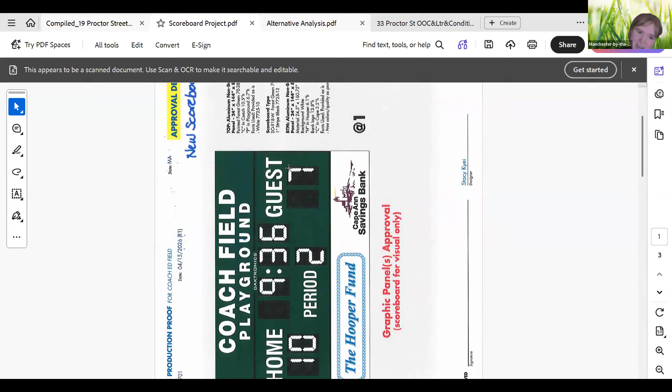Under new business, we have a reference for a scoreboard installation. Bethany, can you share? Yeah, I have something to share. Thank you. Can you see my screen? Yes, now we can. This is the scoreboard. I had to contact Cheryl because the athletic person that originally contacted me is on summer vacation. So she sent things today for the scoreboard, and this is what the scoreboard would look like. And they are using the same footings or just replacing the footings that are already there. And here are the parameters.

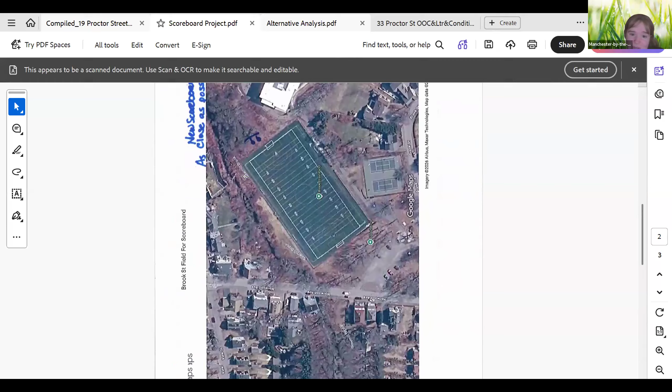I know I can't turn it, but... It's all right. We can all tilt our heads. Yes, we're all doing it. And the intention here is to cover more sports than simply football? Yes. Good. And then they showed a little map, the new one as close as possible to the old spot. And here it is, as you see. It's near the Sawmill Brook, but it's just replacing the old one.

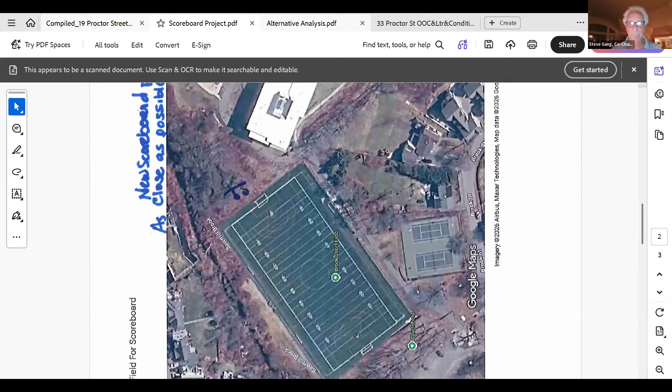So the footings are intact, still there? Mhm. Yeah, good. So I'll just do a letter permit. Yeah, exactly. Anybody have an objection to a letter permit to let that go ahead? No, sounds good. Good. Sounds good.

Any updates? We don't have to belabor these, but we had the trees in Powder House. Any progress on those? The examination of white and black beaches and traffic and parking and other things. Our friends, the beavers? No.

Gordon Woods and JAG, Jefferson Apartment Group, we will be hearing from them on July 21st. They're doing an informal presentation or formal presentation. It will be under new business. It's not a public hearing. It's just a presentation discussion. And I believe it's going to be substantially the same, if not identical, to what they showed the select board

last month. Yes. It's my intention to ask them whether we could rather promptly have a site walk so that we can get our bearings where this is on the ground that they're thinking of working. But other than that, I'm open to any other suggestions. Mark, was there any? Let's talk about it at the next meeting is my suggestion. Yes. Bingo. Yeah, I don't see any reason to rush these things along. Okay.

Finally, on a personal note, my beloved dog, Rosie, we had to put down last week. And I mention it only because she had become a steady companion on Concom site visits. In fact, I sometimes caught her nibbling what we call hydric soil, which is soil that doesn't have any oxygen in it, but has a lot of organic material usually. Something to improve her digestion. So I've always called her the wetlands retriever, and I'm quite sad to announce her departure.